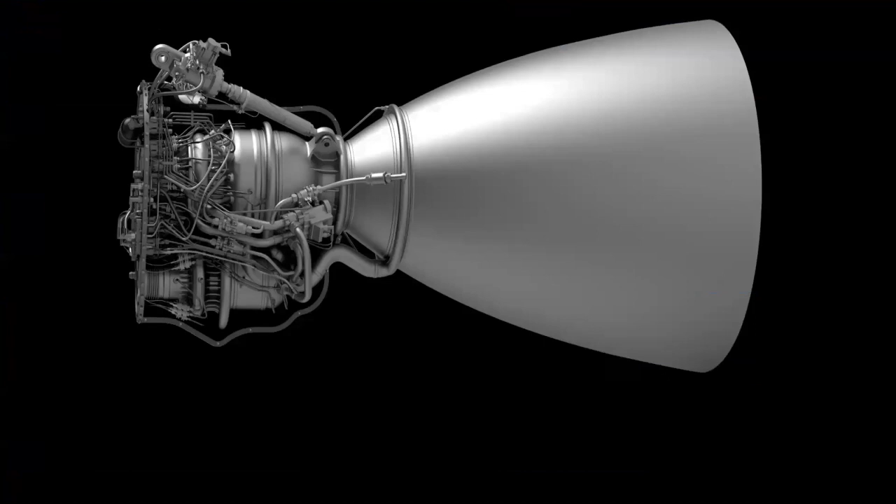This picture is the SpaceX Raptor engine. I wanted to start by showing this because people may not realize this complex engine has 72 additively manufactured parts, 50 of them from 3D Systems. This shows that as we go forward, the capabilities of additive manufacturing are growing, including improved functionality due to freedom of design, or removal of traditional manufacturing limitations.

I want to be clear on this: we look at additive manufacturing and 3D printing as complementary to traditional methods of manufacturing. It's not going to replace it. It's not an end-to-end all solution. It's just another tool in the toolbox.

In addition, as we go through some of these studies I'm going to show today, you'll hear and see a lot about component consolidation, topology optimizations, and stiffness to weight ratios, and this is all made possible because of 3D printing.

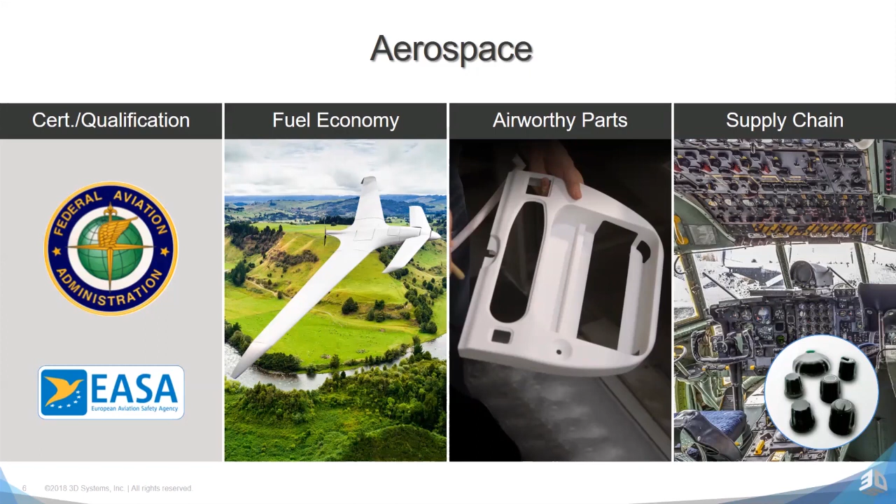In this webinar, we're going to concentrate on one of the vertical markets, aerospace, because it's an exciting and growing market in additive manufacturing, and there's a large interest in applying AM to the aerospace industry. But like any other heavily regulated industry, it faces multiple drivers and challenges to success, and we're going to go over some of those.

That includes a drive to reduce weight, to reduce fuel requirements, a need to address supply chain efficiencies including MROs, maintenance, repair and overhaul challenges, or PMA challenges for the aerospace industry. There's also a really big need for reliable certification of additive manufacturing technologies and materials for aerospace applications. At 3D Systems, we're trying to deliver these technologies, materials, and advanced expertise to enable commercial and defense aerospace OEMs to build 3D production into their operations.

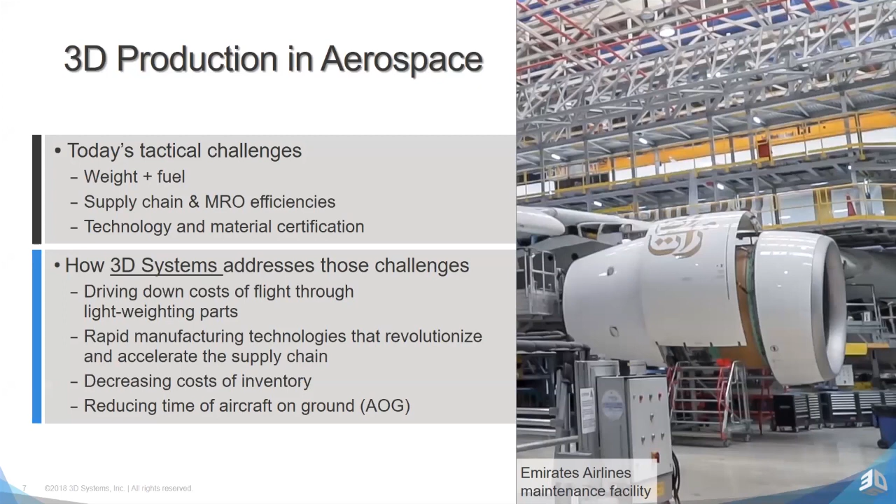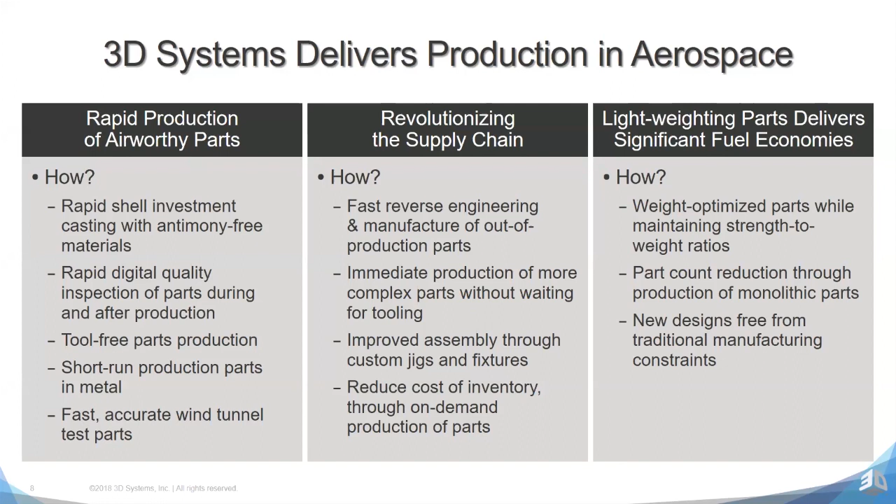We're going to go through some of these, though not all. If you look at rapid production of airworthy parts, one thing you'll see in our case studies is antimony-free casting materials. This allows rapid shell investments to make very large parts for aerospace, or for your supply chain to reduce inventory costs through on-demand production instead of keeping that physical part in inventory. And of course, lightweighting—as we understand the need to reduce fuel requirements, new designs free from traditional manufacturing constraints allow lighter, stiffer designs with better efficiencies for aerospace.

We also work in production in the defense R&D world, whether it's the Air Force Research Lab, the Army Research Lab, DARPA, Newport News, or the University of Dayton Research Institute—you'll see a few of these in this webinar. In July 2019, 3D Systems signed a contract with the ARL to build the largest and fastest direct metal printer, and the success and knowledge gained here can be easily translated to commercial applications in the near future.

That contract was signed last year, and a couple weeks ago another story came out. Our latest Factory 500, which is 125 liters, a half meter cubed metal printer, is one of the biggest on the market. Yet a couple weeks ago the ARL updated, and we now have a 1 meter by 1 meter by 0.6 meter metal printer that we're working on with the ARL to make larger parts validated for production.

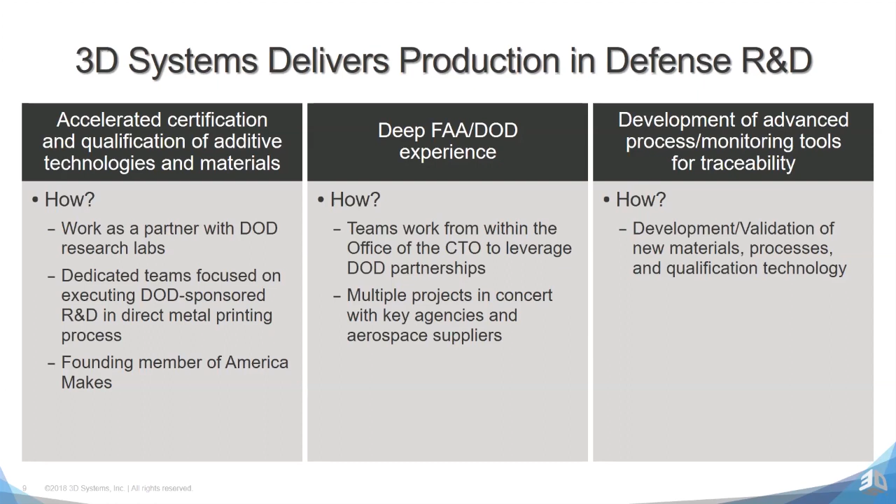I mentioned earlier with our hardware, software and material solutions, I also wanted to add that one of our services, besides on demand, is we offer our customers the CIC, a customer innovation center. It allows customers to come in and see real world applications, see all the technologies working, and see the validation. Our one in Denver is really heavy in medical, so you get to see how a heavily regulated industry works within additive manufacturing. We have 12 of these around the world, and you can actually go in.

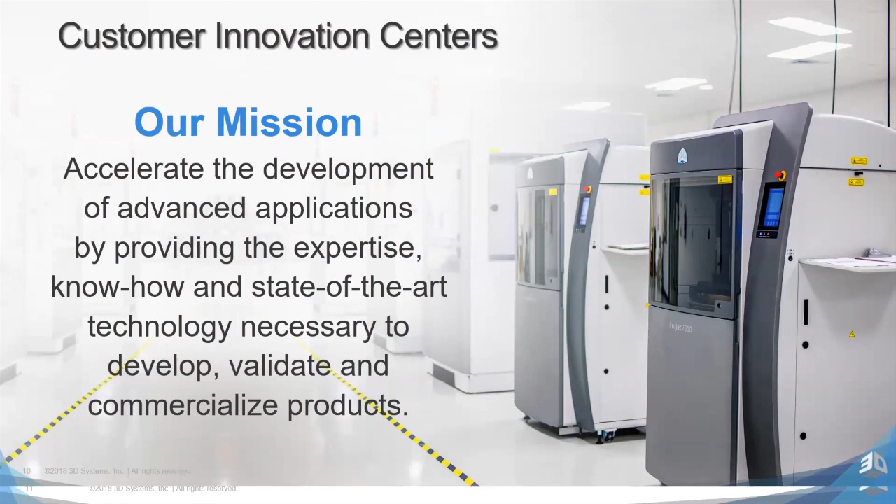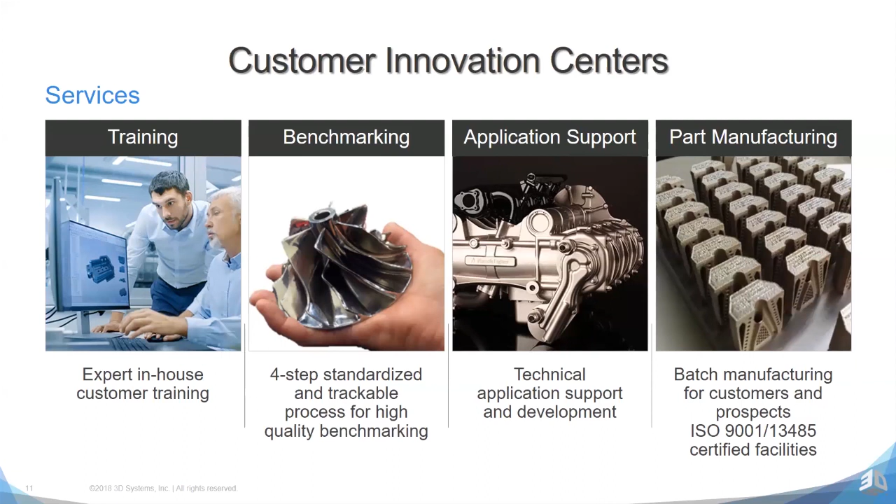In addition to these, we also have several offers and services—not just training, benchmarking, or application support. We do have some part manufacturing, but the biggest part is the engineering, consulting, or validation partnerships we could have, helping get the part not only tested and validated, but also optimized in design for additive manufacturing. This is why we call them our customer innovation centers—we made them for our customers and end-use parts.

So now that I've gone through the required marketing fluff, I'd like to start on some of the solutions offered for challenges our customers have faced in aerospace. This first one is with the U.S. Air Force and DARPA—I had mentioned earlier about DMP inspection.

So what you're seeing here is: how do you tell your part in metal—this is a metal machine—how do you tell your part has proper fusion, no porosity, and that it's going to pass and work like you expect? This is a big issue because metal is the least mature of all the additive manufacturing technologies out there. So we went into a partnership with the Air Force and DARPA, and I'm happy to say we just released DMP inspection.

Let me explain this a bit. On the left-hand side of the screen, you see a picture—that's called DMP Vision. It's basically a perspective-corrected picture of every layer. On the right is the same layer, called DMP Melt Pool—a photodiode melt pool analysis of every scan, every vector, and every layer. We record this and maintain the data.

We just released DMP inspection, which uses both of these technologies and is able to determine how well your part fused and if there's any porosity inside. Our data has shown we've been able to identify porosity at 100% for targets greater than 200 microns, compared to a CT scan. For anything greater than 150 microns, we maintain 95% accuracy, and this continues to be improved. Even down to small particles such as 50 microns, we're still able to identify the vast majority. This will allow quicker validations and certifications for your metal printed parts.

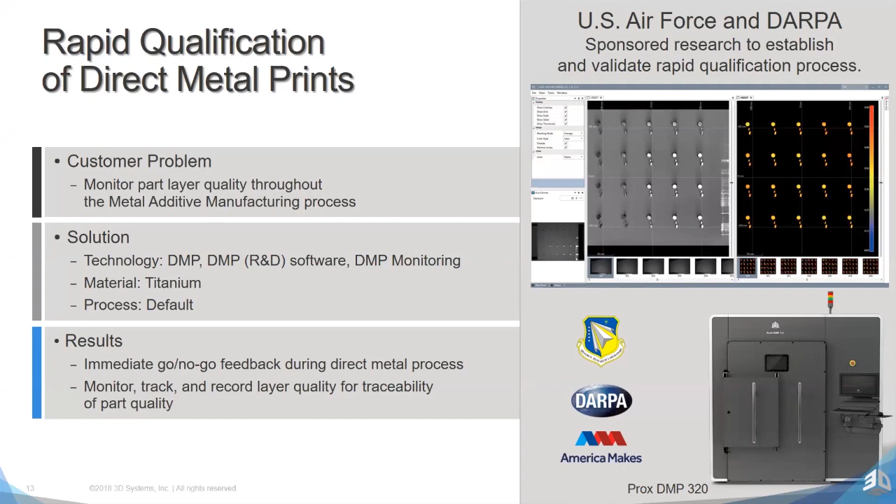When it comes to certification of plastics, 3D Systems is constantly researching materials for new applications, such as a clear FR material for backlit panels or high performance FR polymers. Whether it's FAR, mil-spec, or UL94V rating, we're constantly looking to improve and apply these new materials to the market.

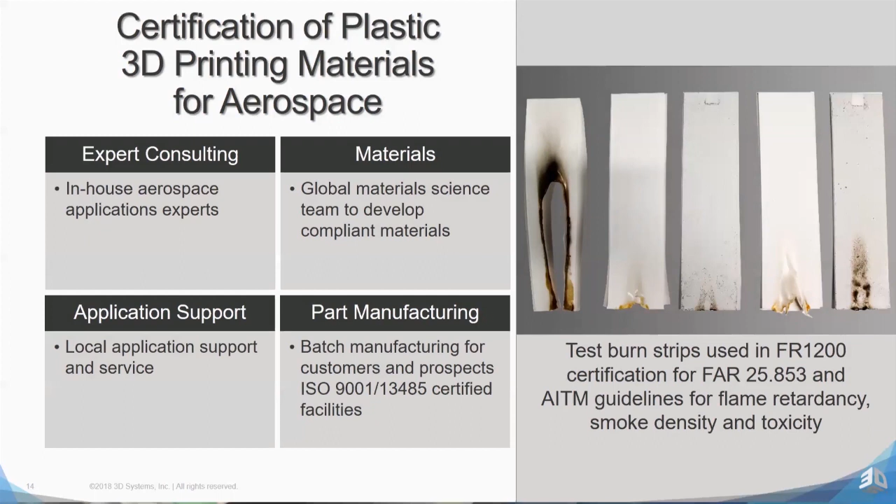Now, fuel economy is once again one of the biggest drivers. I've read different cost analyses for sending a part into space, whether it's geosync or further out, and the amount of money required to do so. This is true for the life of an airframe that may be designed for 30 or 40 years of service. Could you imagine cutting weight off of that over that span? It would save millions and millions of gallons of fuel.

This first example was an unmanned aircraft system. In this particular one, we used HST instead of a carbon fill, which allowed the customer to achieve high performance based on a lightweight polymer. We used our SLS ProX 500 machine, which reduced the supply chain and improved weight reduction—something that could be applied in many applications on a UAS or UAV.

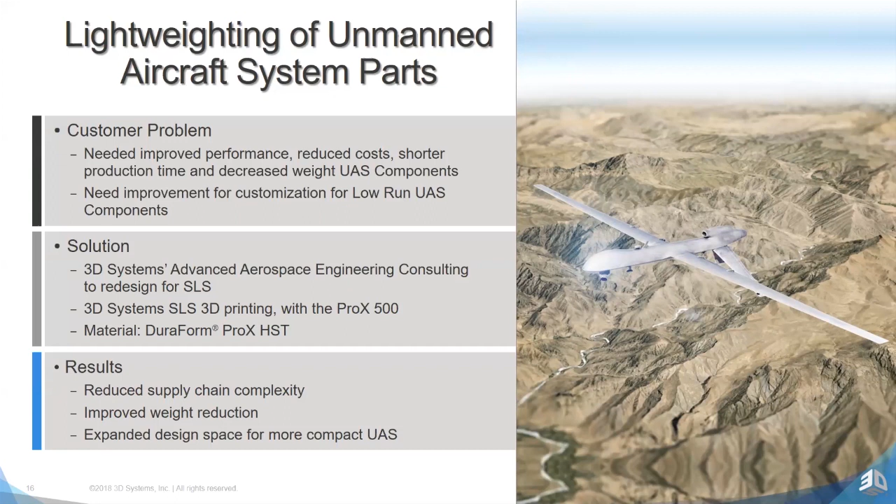This particular one for Airbus Defense and Space is a unique application because RF antennas and waveguides have been built the same since the 30s, 40s, and 50s with very little innovation. They are efficient but very complex to build. In this case, we were asked if we could build a better RF antenna with the freedom of design. We used an aluminum alloy and one of our metal printing machines.

We were looking for weight reduction. We were able to take 30 parts and consolidate them into one part, and we produced it 50% faster. It is actually in flight on a satellite as we speak. But another outcome was that with the new designs and freedom of design, we were able to improve the RF performance. If you look at this design, it's something unique that was difficult, if not impossible, to do with traditional manufacturing.

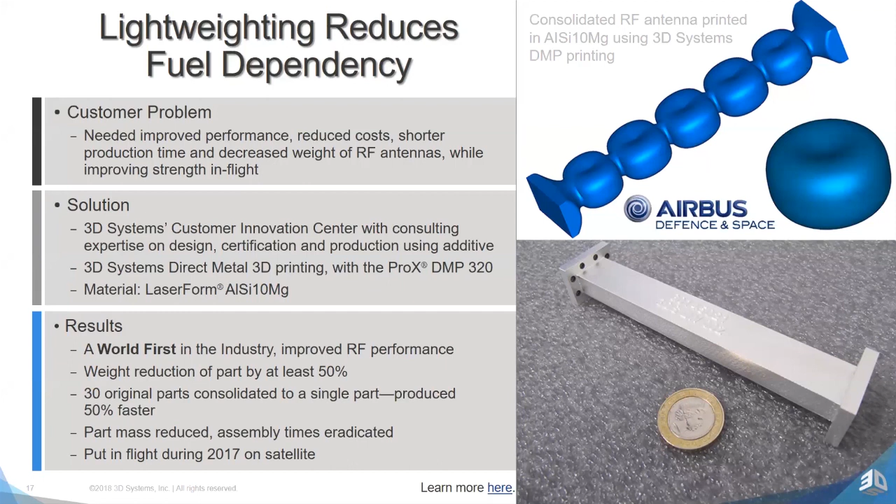This combustion chamber is a really unique story. Keep in mind, when I said the case studies were on 3D Systems, for every one you see here you could go to 3D Systems and get the full detail, but for the sake of time I'm just giving a high-level overview.

This combustion chamber for the European Space Agency was made out of titanium 6-4, and it had a component reduction of 5-to-1. If you look at the original bulky design, it had an external scaffolding. We improved this by just applying an external surface lattice structure, and it was able to achieve everything the ESA was looking for.

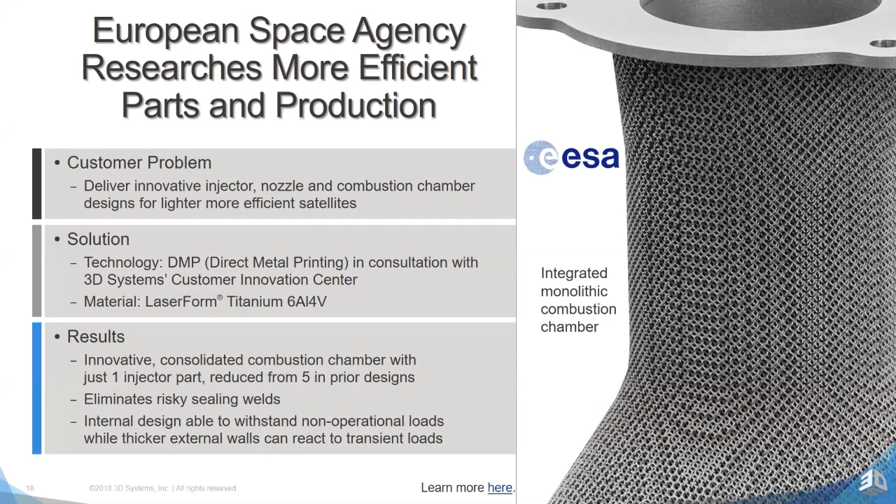With the software, this made it very easy. There were two problems we were trying to solve. One, the original design was bulky with scaffolding because it had to handle a non-operational transient load—in other words, leaving our planet and leaving orbit. During that time, it had to be strong enough to withstand the stresses of launching. But once in space, it had a completely different set of operational requirements. We were able to achieve all of this with direct metal printing and our expert software.

Now, you may have seen this one. It's been out for a little while. The first set was put into flight in 2017. One of the things you may have heard in the industry is the buy-to-fly ratio.

For example, on an F-35 there's a bracket near the rear of the engine made with TI-64. They have to take a 15 kg block of material and whittle it down to 500 grams for this bracket. So where are the other 14.5 kg? Well, they're on the shop floor or inside the machine. Whereas you're able to build the part you need with topology optimization or optimized additive manufacturing design, without that waste stream you have with the buy-to-fly ratio that's so prevalent in today's market.

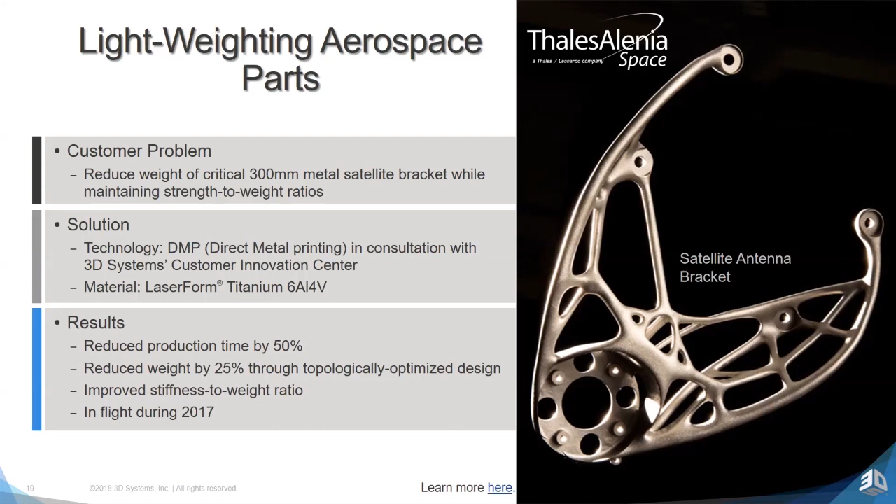We were able to print this in titanium, reduce the weight of the bracket by 25%, reduce the production time in half, and yet improve the stiffness-to-weight ratio where required. Now, if you look at this bracket, there are 5 touch points on the other side of this picture that did require traditional machining. So I don't want to say this was printed as-is, but our software was able to add a little bit of stock, produce the codes, and it was easily machined off at the 5 touch points where it actually attaches to the satellite.

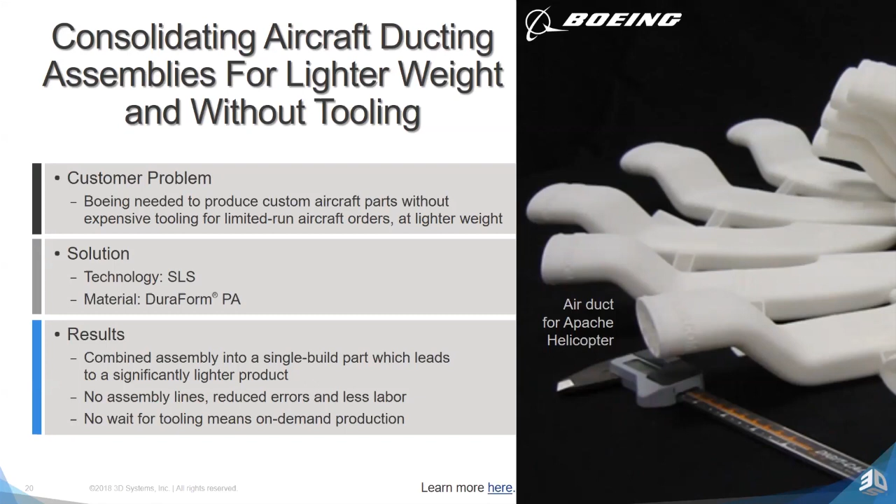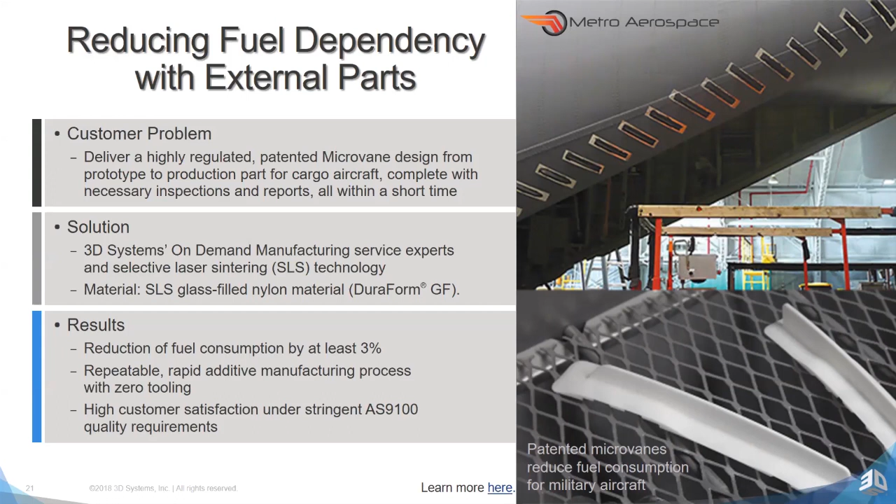What this was able to do, because in every one of these placements the fuselage design is slightly different, each of these parts are slightly different based on location on the fuselage. So they're not just mass produced, they're produced with a slight variation. We were able to help reduce fuel consumption by 3%, and again this is with zero tooling, and you could do it on demand.

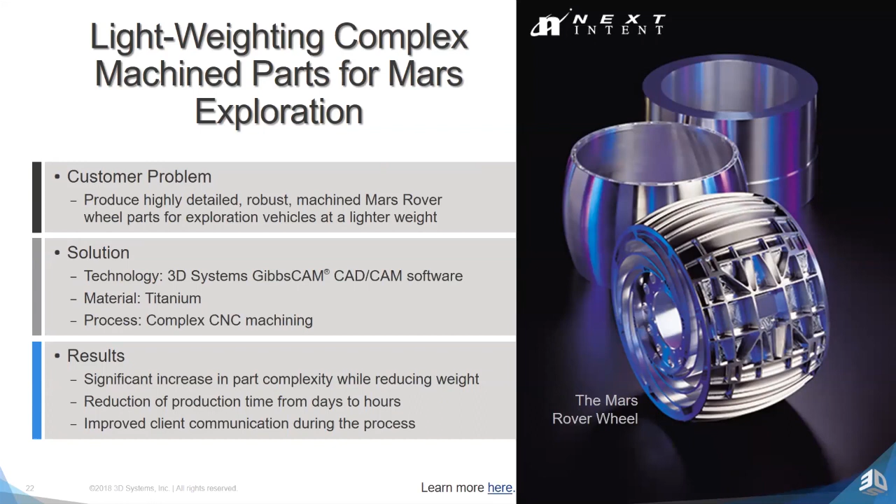Now, I mentioned earlier that as much as I love 3D printing, it is complementary to traditional manufacturing. This is a perfect example where traditional manufacturing was used. 3D Systems used our GibbsCAM CAD/CAM software to help produce this complex CNC machining for the Mars exploration rover, for the wheels that they're going to be using.

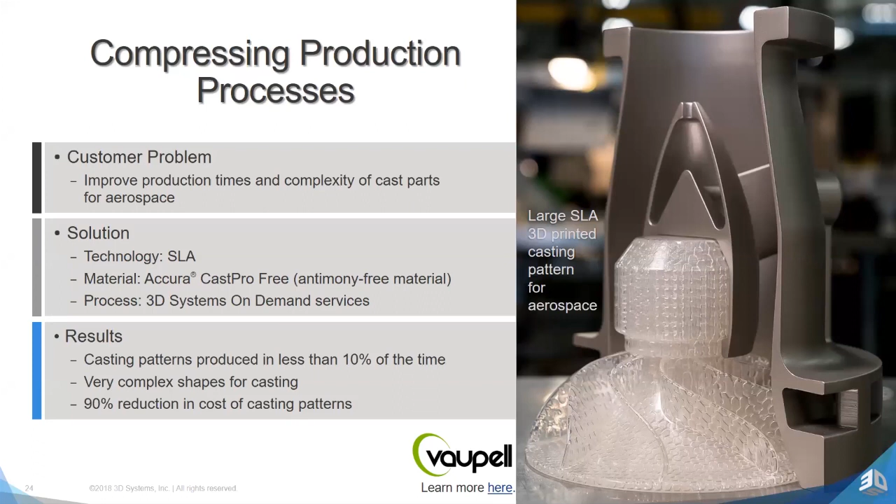They were able, even with this improvement, to significantly reduce the cost of casting patterns as a whole. This basically means casted parts could be produced far faster with more flexibility at cheaper cost than some traditional alternatives. Keep in mind, 3D Systems is always looking to improve this, so keep tuned to 3D Systems and your partner D3, because we'll be looking at improving our QuickCast capabilities, including printing faster, reducing material consumption, and reducing the ash content, which is so critical in these applications.

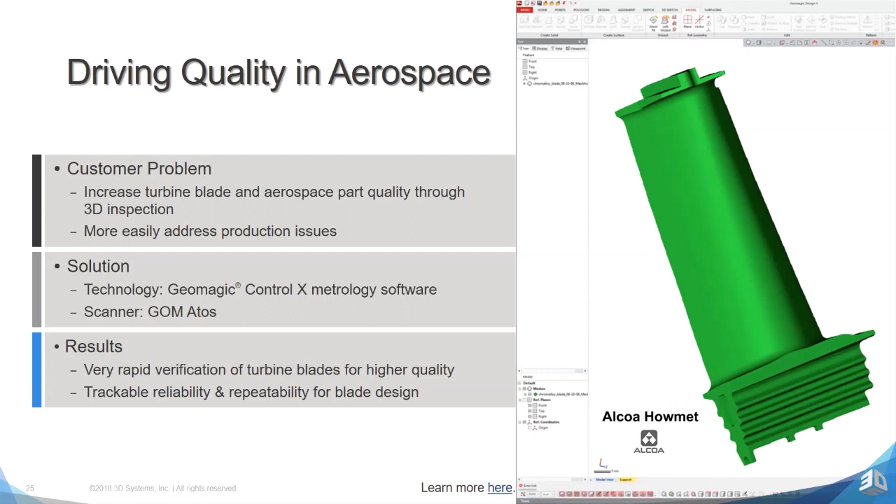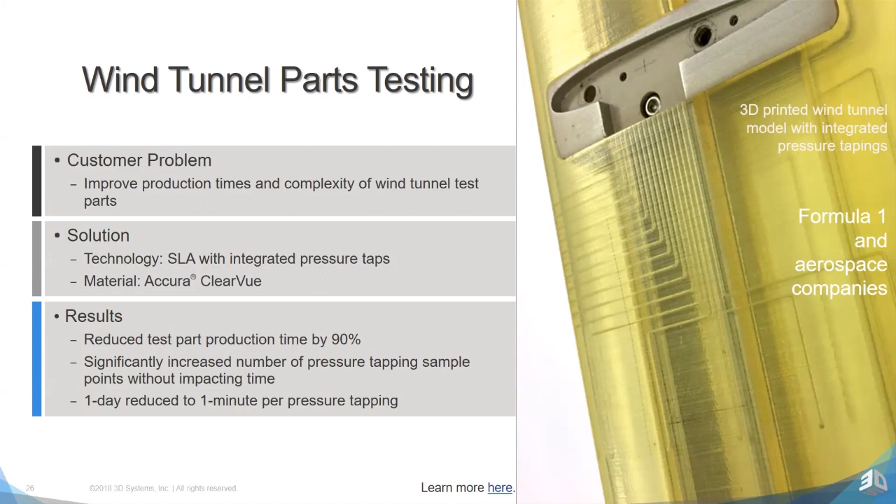I think everybody has heard of aircraft, people pulling off their luggage and hitting an exit sign. A broken exit sign is a red X item for an aircraft. Why should it be grounded when you could print one instead of having it flown over from wherever your physical inventory is, if they have it in inventory, and lose that revenue?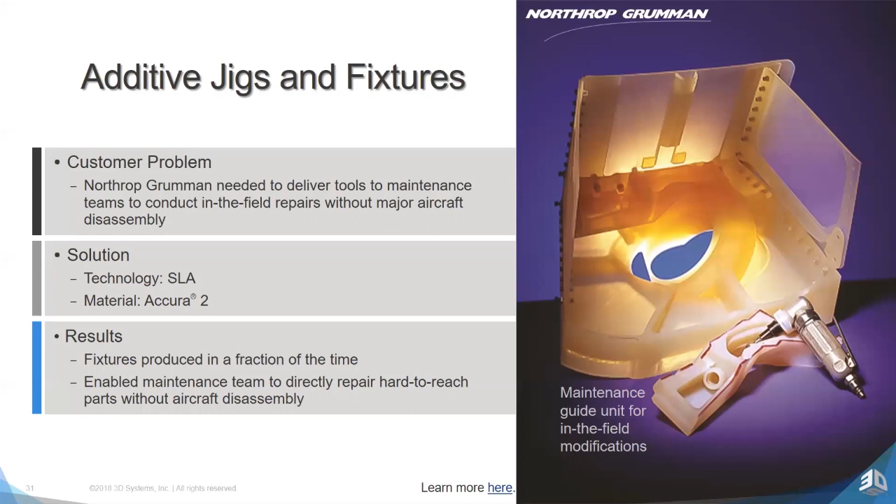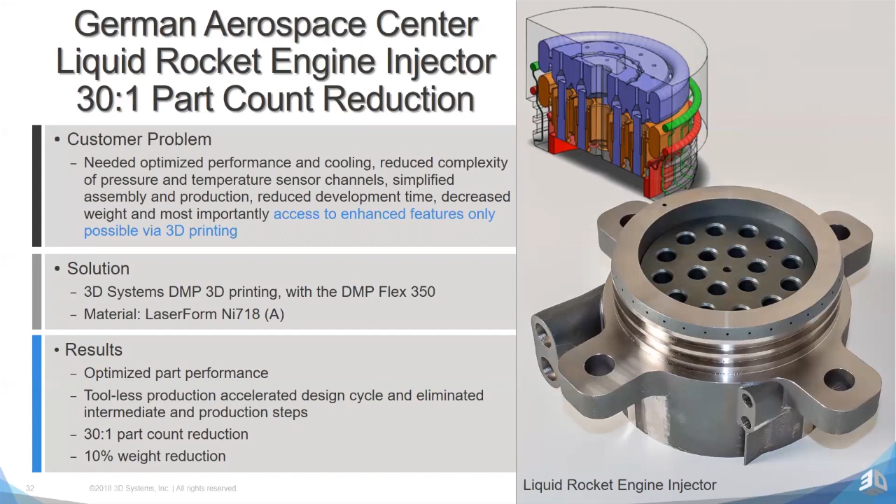This case was a German aerospace liquid rocket engine injector. You see the part reduction count—component consolidation is a big capability. If you look at the CAD drawing in the upper right of this slide, the injection head flow volumes: blue is liquid oxygen, orange is kerosene, red is the film layer, and green is the transpirational cooling. This would have been impossible without additive manufacturing. It was built with our DMP 350 using nickel 718 as the alloy of choice.

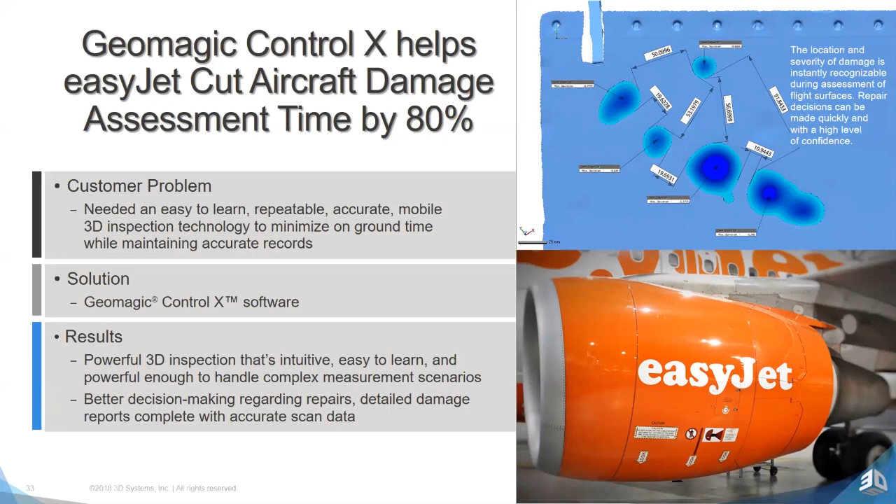Here's another scanning solution that we helped with EasyJet. As aircraft run into different storms or sustain damage, whether on the ground or during flight, you need a powerful way to inspect any damage or change. This allows management to make a proper decision based on the repairs and based on this data. We use our Geomagic Control X software to show the damage on the flight surfaces.

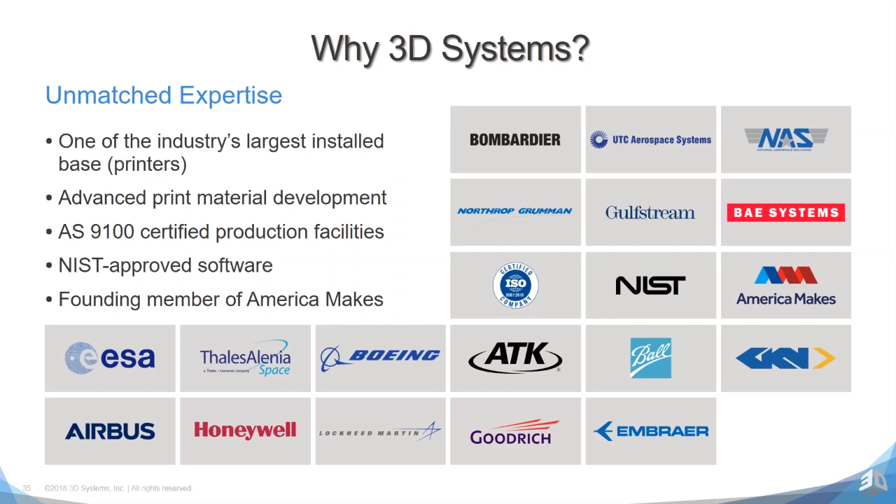As I near the end of my presentation—why would you look at 3D Systems? It's nice that we started this industry, but we're definitely not the only players. People like Scott Crump and University of Texas have added to it, and everybody else out there has really enabled a brand new market and capabilities. But we are integrated across all of our portfolio solutions—technology, software, hardware, materials—and we've been able to provide some of the biggest solutions for our customers. We're also a founding member of the America Makes team.

As I close out this part of the presentation, I wanted to show you a slide I borrowed from one of our upcoming webinars. This is an actual real aerospace bracket, a real solution. I only wanted to show a couple of slides from it, but this shows how you could make additive manufacturing part of your process flow. From the very beginning in Design X, we took a design that had been made with traditional manufacturing in mind—with all those limitations. You could see the original design was heavier, bulkier, and clearly made in a subtractive environment.

We were able to go in and use our Design X and 3DXpert to make changes for additive manufacturing, improving the functionality and reducing the weight. The next slide, labeled 'prepared,' uses our 3DXpert, and the slide above shows our simulation of where the stresses are going to be. We ran through this design with an algorithm that allowed the FEA to show where the stresses were going to occur, and sometimes these could be minimized with a design change, or just orientation and how you support the part. Then we printed it on the DMP Flex 350. The next section, under inspection, shows two parts: the top one was DMP monitoring inspection, which I spoke about earlier.

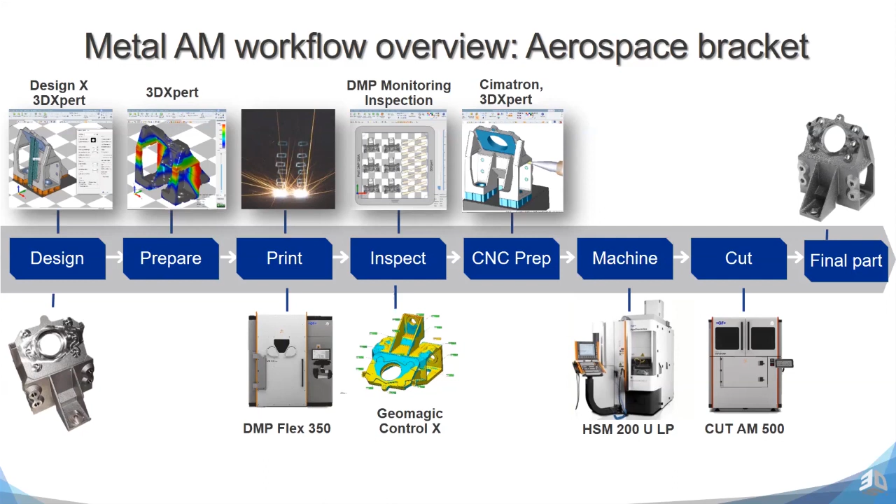And then of course you ended up with the final part. I did want to show you a little bit closer up on some of the layout on the machine.

That will be on the left, using our 3DXpert software and how we optimized it. And then a little bit of a close-up shot showing what kind of supports. You can see there's two different types of supports we were able to use, also with a stock allowance on the bottom for the EDM to cut off cleanly.

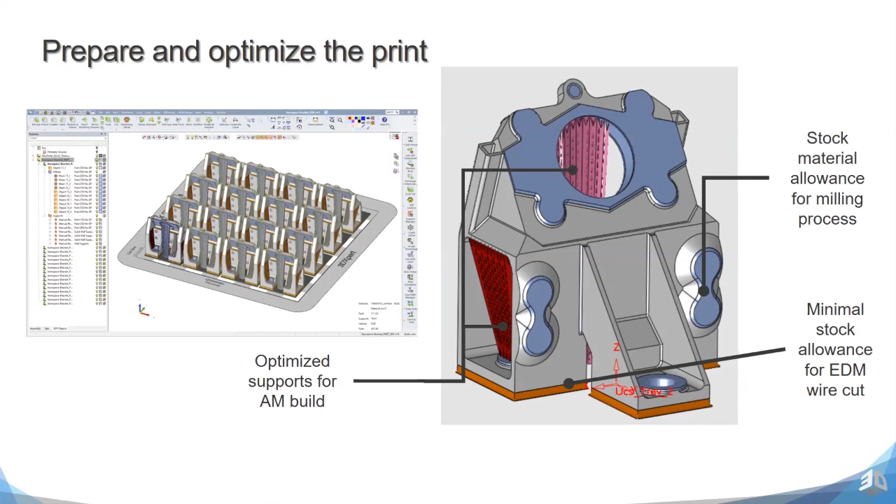And then we showed a couple of the darker gray areas where we optimized the design for additive and then added a little stock on there because the end customer wanted to have a super finish on these. Matter of fact, somewhere close to a bearing surface finish. So we added a little stock and produced the CNC code to have it post-processed to within the customer specifications.

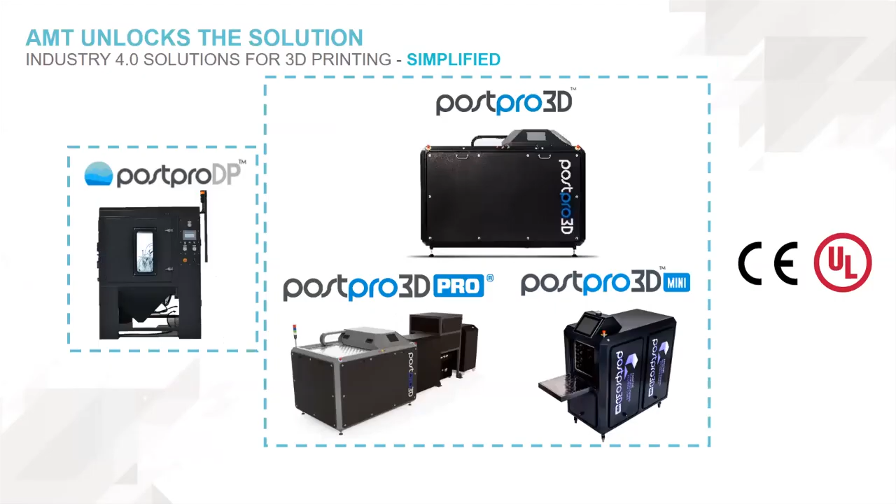So with that, we can move on to the portfolio of technologies that we develop. At the center, we've got Post-Pro 3D, which is our flagship product. It's where the company got started, around the surface engineering and surface finishing technology, which we have an exclusive license from University of Sheffield to develop equipment and further commercialize the technologies for the solutions that I'm about to dive into.

We've been able to use this flagship product and the core technology of a very sustainable controlled surface engineering method and develop the technology for an industrial package. With that, we've scaled it to a miniature size, what we call the Post-Pro 3D Mini, and also scaled it for production, what we call the Post-Pro 3D Pro. It's essentially the same surface finishing technology, the same surface engineering methods, just different configurations that cater to different industry verticals and different types of end customers.

If you're familiar with post-processing and surface technologies, you'll appreciate that the biggest variable on your parts doesn't necessarily come from the finishing process itself. Sometimes it does, if it's manual post-processing, but a lot of times it comes from upstream processes like cleaning, support removal, depowdering. For us, that variability is unacceptable. So the next logical step was to develop automated solutions that can remove that variability from the upstream post-processing methods.

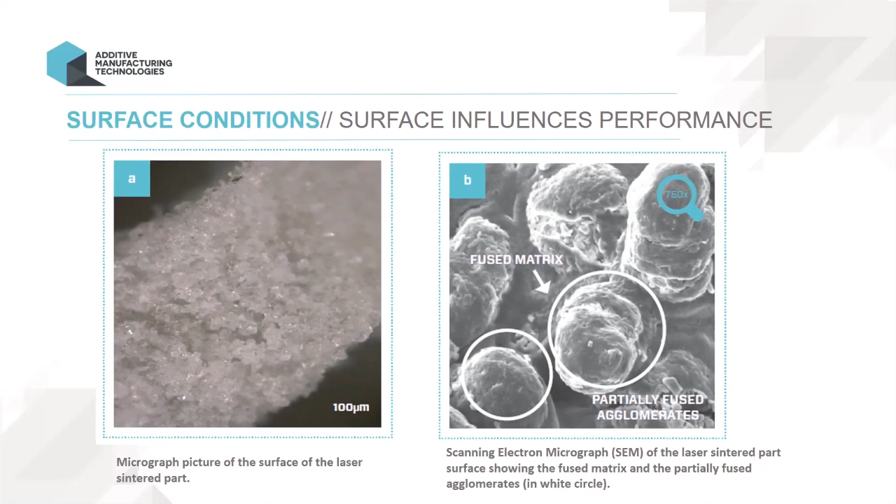So our technology, the Post-Pro 3D technology, is able to address that challenge in a very innovative way, using chemistry and physics in the engineering that comes with the equipment. I'm going to jump into the next slide that will also emphasize - we're talking about being able to address the 50 to 100 micron area within the edge of your parts, where the partially fused particles are.

You have good parts produced by great, very capable printers, but these parts can be better by addressing a chemical process - a controllable chemical process - that addresses the surface imperfections on the part, which may come from the materials themselves sometimes, as you saw in some of those micrographs earlier. David, next, if we can go to the next slide.

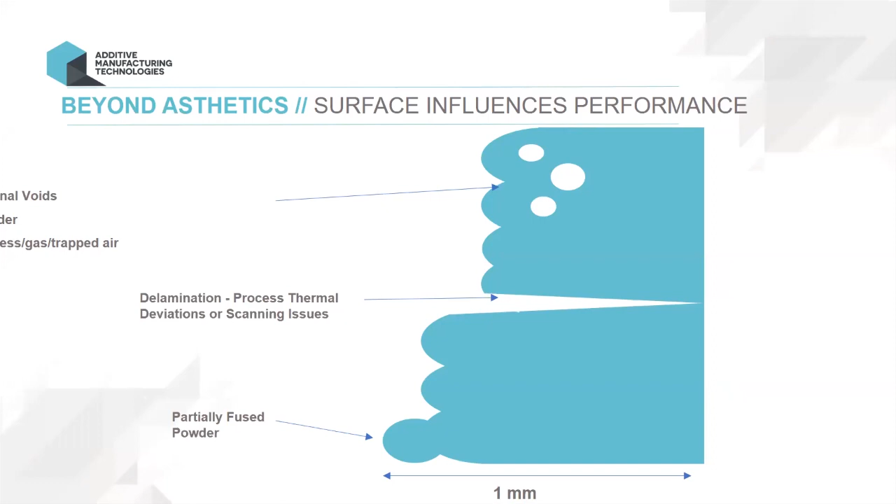One of the unique features of this technology is that it's controllable, so there are no line of sight issues. We're not removing material, we're not adding material. We are using what is already on the surface and reflowing it, using it to our advantage to fill in all the surface porosity and get a very smooth, uniform surface for these parts.

In turn, by having these capabilities and these controls, what you end up with is a surface that's sealed, has much better water absorption performance. It's a surface that can withstand pressures - if you're 3D printing vessels, for example, that need to be pressurized, they'll be able to sustain gases. And as I said earlier, it erases the crack initiation sites. So with that, you get much better elongation at break, which is a critical mechanical performance for the material and the parts you're producing, specifically for aerospace.

And with that, you also see an uptick in UV resistance because there is a lot less moisture absorption at the surface, and less exchange of evaporation of that moisture with the sunlight affecting the mechanical properties of the material. So all the issues really start at the surface.

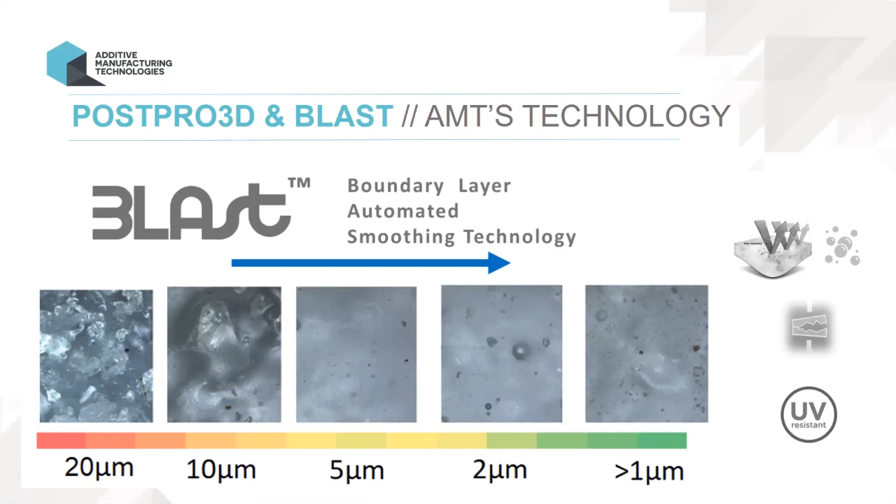So we thank David Cullen for the invite, and we also thank him for constantly running applications through us. We have an ongoing collaboration with 3D Systems, and it's been a very good collaboration. I think what we've found is that it takes this type of collaboration for us to truly understand what we've developed. It's a technology that many of you may think only addresses aesthetics of the part, but through the partnership with 3D Systems, we've been able to quantify and measure the capability of the technology and the value we're adding to the performance of parts that are already good, making them great.

So to give you an idea of what the machine looks like, this is the Post-Pro 3D machine. The chamber envelope is 600 by 400 by 400 millimeters, 24 by 16 by 16 inches. It's a closed loop system, and what's important to understand is that we're not using water, we're using better chemistries, less energy and less labor.

We can go to the next slide. And the process, the way it works, is you have a chamber under pressure and temperature. We rack the parts, and they are suspended into racking systems that can be customized and standardized for production. Once we pull the vacuum and under temperature, we control the amount of chemical that is dosed.

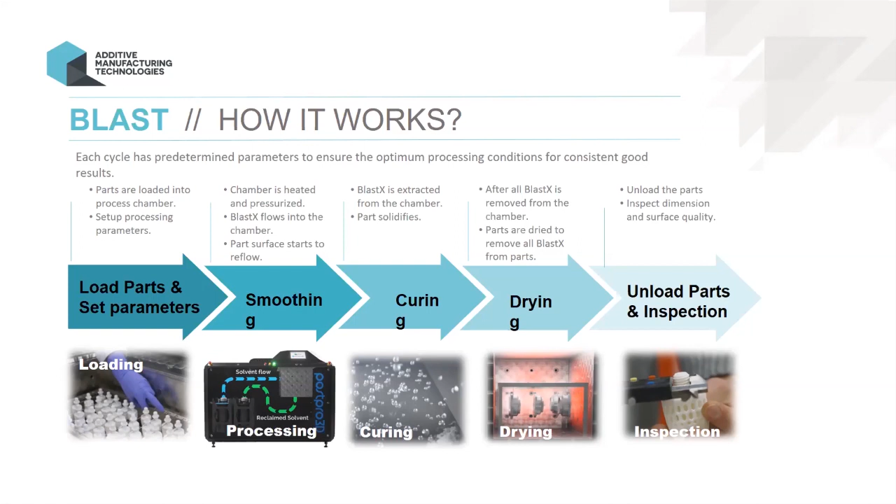If we go to the next slide, David, we decided to take nylon 11, as David pointed out. 3D Systems is just an example - we have more data on multiple materials. The technology works with any thermoplastic out there in the market, 120 plus different thermoplastics we've been able to process, but we decided to take nylon 11 because it's the best performing material. EX Black is a phenomenal material, the material of choice as far as polymers for the aerospace industry.

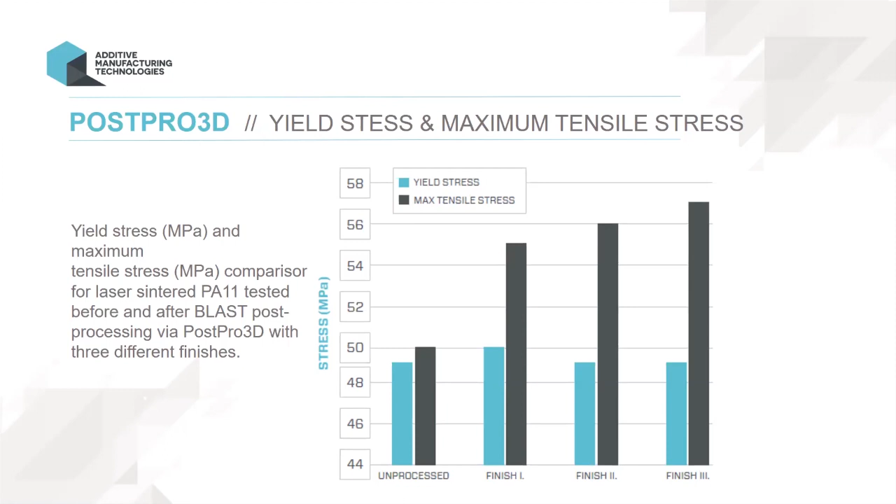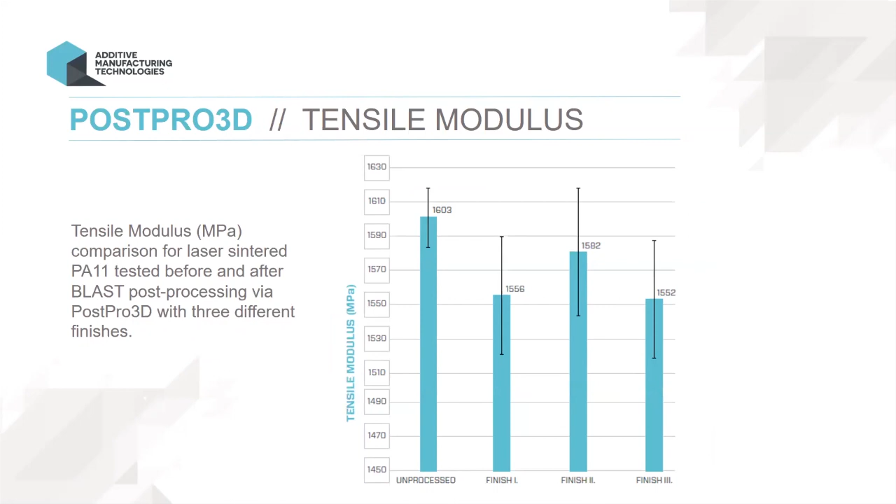And these charts give you an idea of the before and after tensile stress, the tensile properties and the uptick. Our technology will not change the tensile strength or yield strength too much, but if we go to the next slide, David, you'll see that we're also not changing the modulus, which is important, because if we go to the next slide, we do have a significant gain in the elongation at break.

Nylon 11, when you're producing parts with printers like 3D Systems, you can get maximum elongation at break properties that are around 50 to 60% if you're really using the parameters that David has developed for performance. And after our post-process, that elongation at break will jump sometimes to 200, 225, even 240% elongation at break.

So yes, the parts - we do that without necessarily modifying the modulus. You may say, well, you're softening the parts, so you're stretching them more. That's not the case. We are retaining the modulus, which is critical. You cannot do that with just any single chemistry or any single process.

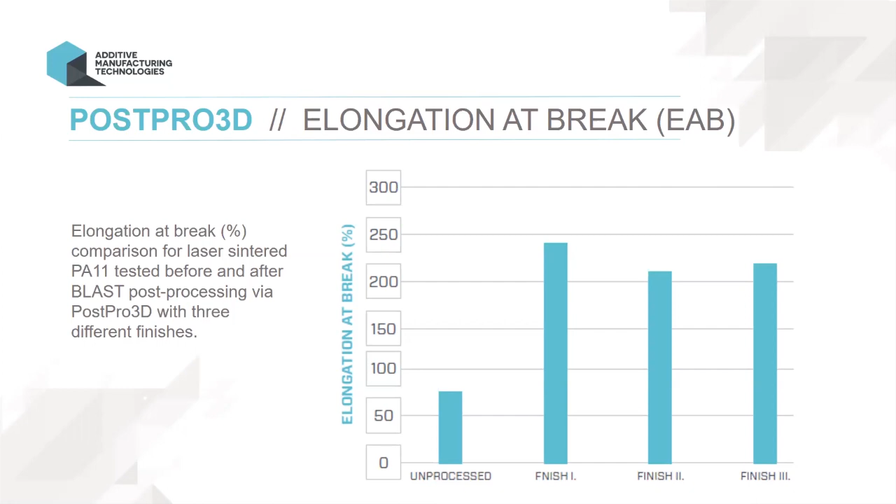So if we go to the next slide, David. I want you to note that you can go directly to 3D Systems with any questions about data around our process or any benchmarking that needs to be done. You can also contact us directly. We do everything free of charge—well, not everything, but every benchmark we do free of charge. We're willing to talk to you about your applications, but I'd like to open the floor for questions, whether it's for David's phenomenal presentation or any of our technologies.

Before we do that, Luis, thank you very much for that presentation. I do want the audience to know that it's absolutely true: failure points start with an inclusion or a defect on the surface, and it could really reduce what you get from testing with a standard ASTM approved bar or DIN or whatever it may be.

I want to share a good story that we hope to see a white paper out later this year. Using 3D Systems' SLS 6100, a third-party material we don't currently have in our portfolio, and AMT's partnership, we did a quick test of an FR polymer. Three different companies with three different products, and we wanted to see how we could improve it. Although the part came out of our machine smoother, with higher mechanicals and better recyclability than the legacy equipment, the fact was they still wanted better performance.